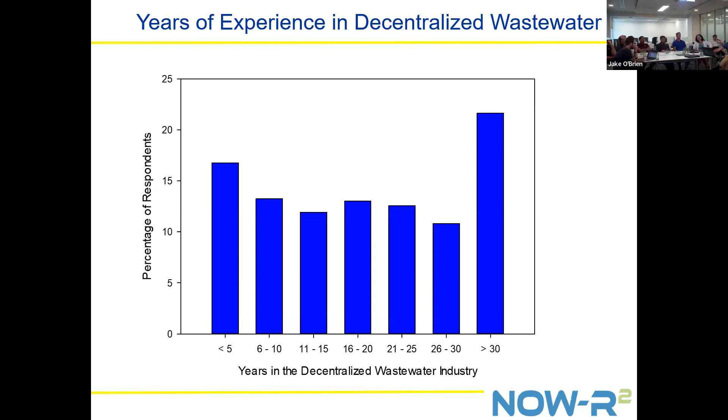I thought this was really interesting, and it really gets at where our industry is at, is that most people have been doing this a while. You can see the greatest respondents was more than 30 years, and one of our challenges is the less than 5 years, which will come up a little bit later in the demographic information.

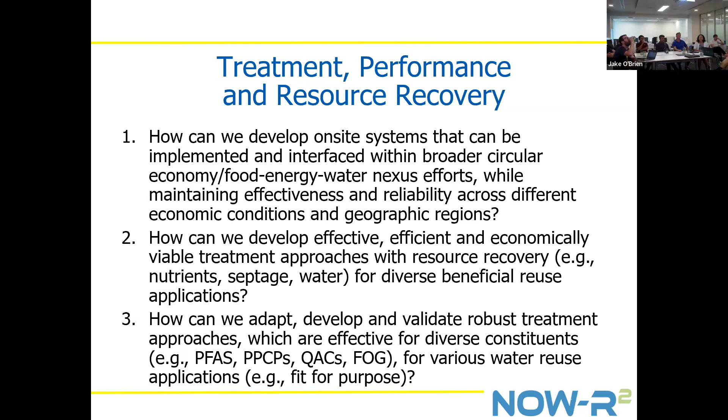And the last one is really looking at more emerging issues. How can we adapt, develop, and validate robust treatment approaches that are effective for things like PFAS and pharmaceuticals, for various water reuse applications? So the second bucket was around resiliency, efficiency, and sustainability.

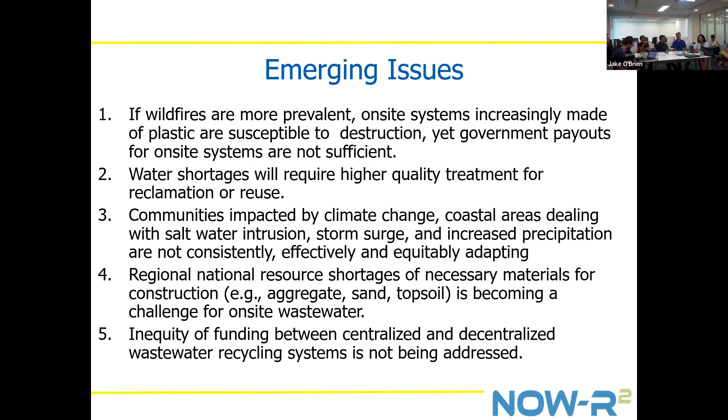So those are some of the challenges. There are certainly more, but I just wanted to hit some of the highlights. I think as an industry, we've come a long way. And the purpose of this exercise was to point out that a lot of the research that we use as the basis for our systems and implementation was gathered around when I was being born.

Which Ben asked me how old I am. I'm almost 50. So let's just say 50 years ago was when a lot of the fundamental research was done, and have we made some strides? Yeah, but there was a huge investment at that time into really figuring out some of the science, but we really haven't had that same concerted effort to continue to move our industry forward. We kind of had piecemeal approaches, but we're hoping that the results of this, when published, are something we can take to stakeholders and funders to really help our industry continue to move forward in really recycling water back into the environment safely.

Thank you, Sarah. Just quickly, I'll start off with a few questions and I'll get Dendra to let us know with those ones there in the chat if there's anything pressing from the audience.

But do you think one of the reasons why we're bad at lobbying is that as an industry, we're decentralized? Because here in Australia, I see how well Sydney Water does and Melbourne Water does, and the bigger water utilities, SA Water, they've got 1 million people, 2 million people, 4 million people in a small area. And they just seem so much more effective at their lobbying than what we do, where here in Australia, it's maybe 2.5, 3 million people which are in the industry, which is much bigger than some of these organisations which are better at lobbying than us. But we're spread out and we don't talk to each other. I know that NOWRA has started going to Congress every year. Has that had an impact?

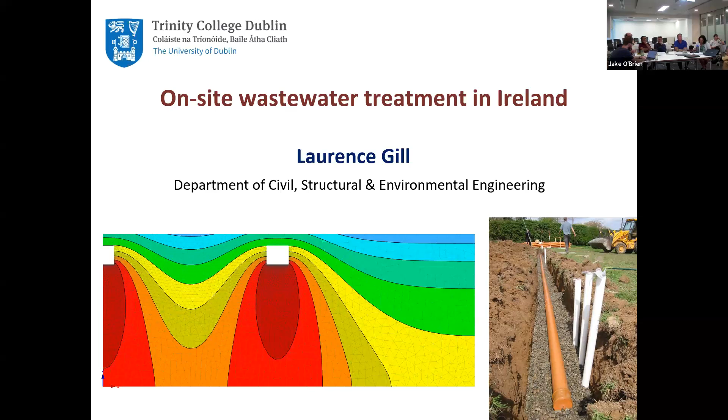But one area I've particularly focused in on has been on-site wastewater treatment, and it's all been done at field scale, and then we develop a lot of numerical models to make predictions to improve the processes, or what contaminant loads get to the groundwater or get to surface water. So I'll just give a flavour of different stuff we've done. First of all, just a few key characteristics about Ireland itself on the on-site system.

So about 1/3 of the country actually is on-site wastewater disposal. So 500,000 dwellings, most of which are septic tanks with soil percolation areas. A lot of those also have their own private on-site well supply, so about half those. So there's a risk there of contamination from the human health perspective. But most of the drivers in the EU are more the ecological targets in terms of river water quality, ultimately.

So from a geological perspective, for a small country, we have an incredibly diverse range of geology, but in general, the bedrock and the water table is very close to the surface, so we don't have a very deep unsaturated zone. We have a lot of very old rocks and fissured, fractured rock types. So if the wastewater contaminants get into the groundwater, they move very quickly. We have a lot of karst.

I spend a lot of time developing models for karst systems, karst limestone, and about 2/3 of the country is underlain with karst. So the relevance for on-site is basically by the time the contaminants hit the water table, it should be as clean as possible. We don't consider that there's any significant treatment in the groundwater from a legislation perspective.

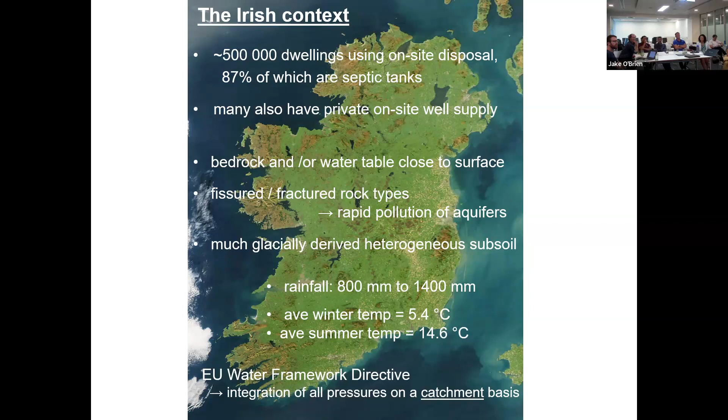And then we have a lot of this glacially derived subsoil, which is very low permeability, which I'll talk about in a minute, particularly in the northern half of the country. The last glaciation was only 10,000 years ago. The rainfall varies from east to west, really. In Dublin, we don't really get that much rainfall, contrary to what most people think. But the more west you go, the higher it gets. And you can see our temperatures, we don't get really cold weather, and we certainly don't get very warm weather. So it's quite a mild climate, because we get the Atlantic coming in, buffeting the island all the time.

And from the legislative process, everything now is really under the Water Framework Directive, whereby all the contaminant pressures are viewed on a catchment basis. There's a lot of work by the EPA trying to work out where are these key sources of contaminants, particularly nutrients, and then we're in a phase now as to what can we do about it. So I spent a lot of time working with the EPA, developing models that feed into their overall model of Ireland as to, from the on-site wastewater perspective, what contaminants are going which direction, and in different soil types, how bad are they?

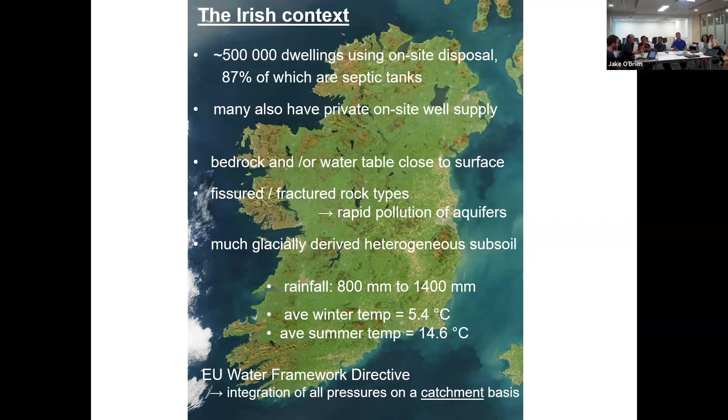So we have this code of practice by the EPA, which is a legislative document that I've helped to develop over the last 10 years. And to be fair to them, a lot of the research has fed into the numbers. So the EPA have been funding people, but particularly us in Trinity, over the last 15 years, to answer certain questions about on-site wastewater treatment, and particularly soil treatment. And so we've been carrying out studies, and then they have used these numbers. So in general, in the code of practice, there's three kinds of scenarios.

This is for single houses. So you have a septic tank going through the unsaturated subsoil. You might have a package system going through unsaturated subsoil, going to groundwater, or a septic tank with some sort of process constructed on site. It could be a sand filter or a reed bed. But the key thing is that it all has to go through the unsaturated subsoil.

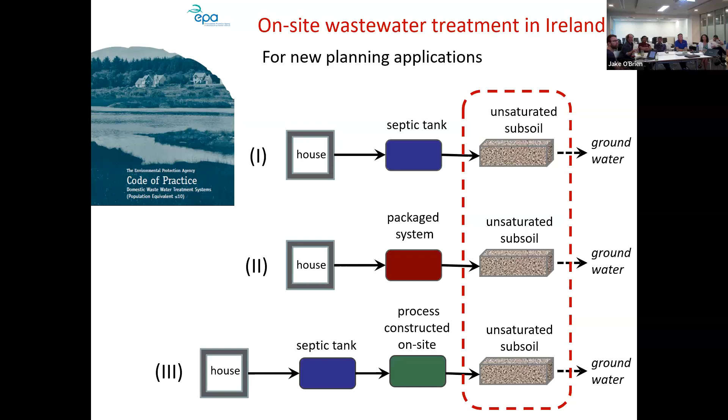That's really, from my perspective, the key treatment step that I focus on. And in counties, although theoretically you can go straight to surface water, none of the counties allow that. So everything has to go through to groundwater. And so this can be problematic in low permeability soils. So I'll just run briefly through these different areas that we've looked at.

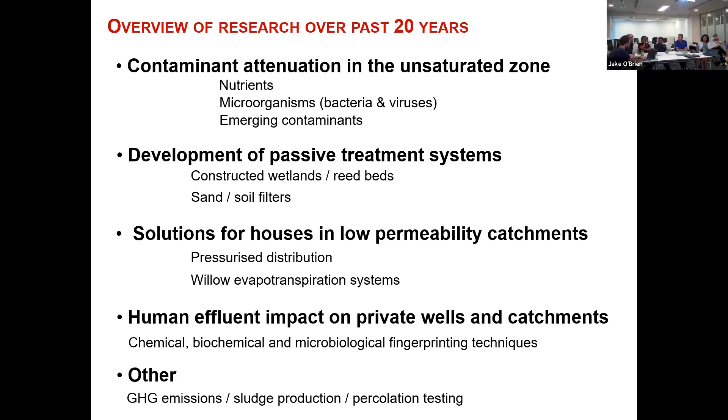So first of all, contaminant attenuation in the unsaturated zone, development of passive treatment systems. We're recently doing quite a lot of work on solutions for houses in these very low permeability soils. We've been looking a lot recently also at tracers of human effluent. So again, on a catchment basis, if you sample a river, what percentage of nitrogen or phosphorus is coming from on-site systems versus agriculture. So we looked at a lot of chemical, biochemical, microbiological fingerprinting techniques, and then a few other things which I'll just briefly mention.

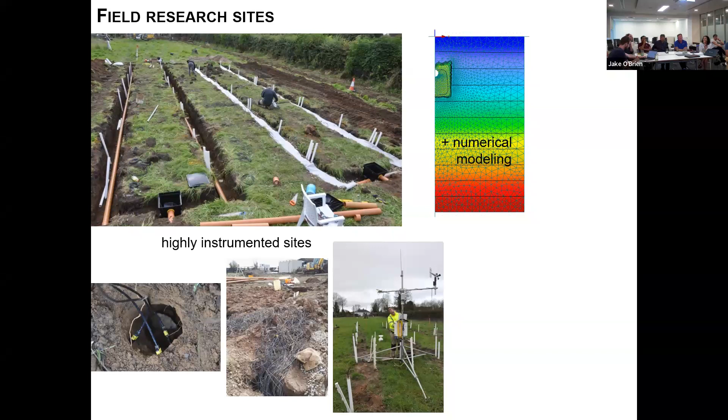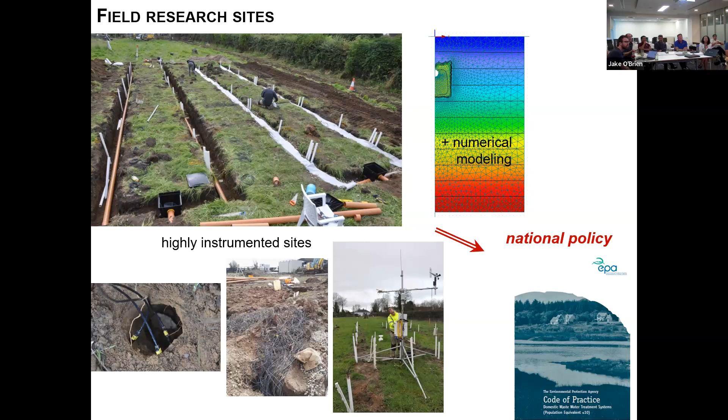A lot of our systems, we look at a gravity distribution as well. So over time, you get the spread of the biomat further and further along the trench, and then we link that into the meteorology. So from that, we develop a lot of models, finite element type models for water flow and contaminant transport, and then that all gets integrated into these design codes, I guess, for different soil types, and then that has ended up in national policy. So that document you can freely download on the website.

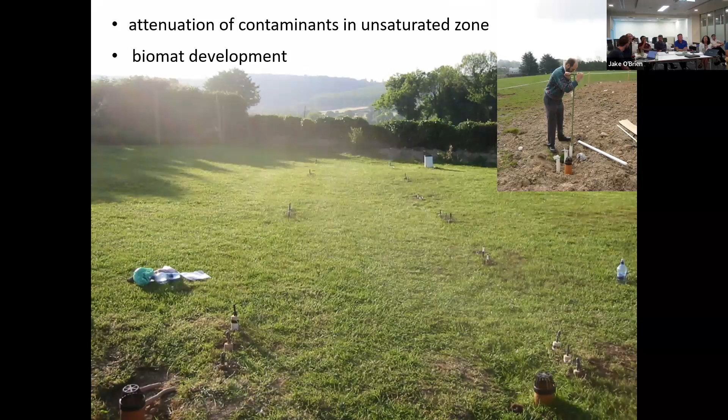And so these are different things that we've been interested in over the years, particularly this growth of the biomat over time. The septic tank effluent has a lot of organics coming out into the soil that develops this quite dense biomat, which spreads the load quite evenly. And at a lot of sites we find the quality of effluent a metre below the trench from septic tanks is much better than if you have a packaged treatment system, because you don't get the development of that biomat and you get much more intense, faster flow down. I know that's maybe slightly controversial, but that's certainly what we've seen time and time again. So if you do have the right subsoil conditions, our advice is to use a septic tank, not to go for a higher degree of treatment.

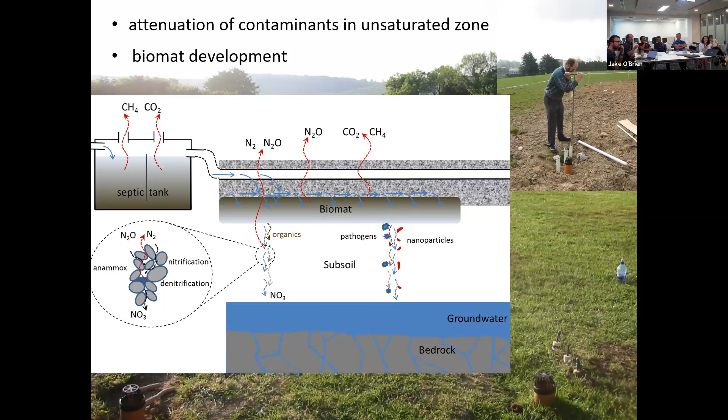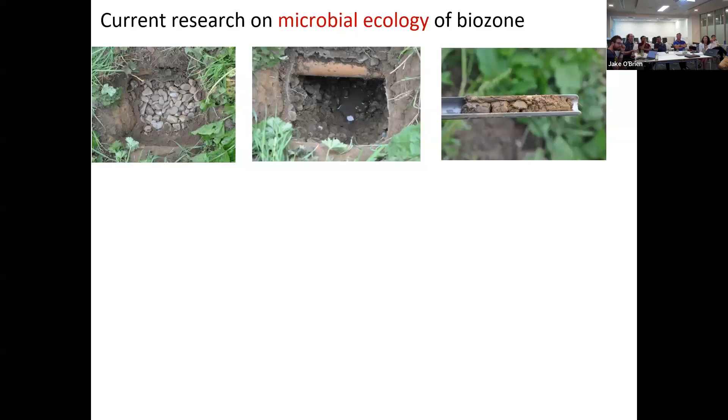And so we've also recently been doing a lot of work on greenhouse gas emissions, which I'll mention at the end. At the moment, we have a new lecturer who's a microbiologist, so we're digging up a lot of these old research sites that we know intimately, and sampling them, looking at microbial ecology. In terms of data, it's unbelievable, this molecular biological information that comes back. But we're trying to link this into the different contaminant breakdowns, so looking at different species of bacteria, different depth levels in the biomat, etc.

So this is all stuff we're looking at now, which is fascinating. Like I say, it's another world what's going on in the soil in terms of all these different organisms, and then linking it to how organics break down and how different nutrients get to different levels, etc.

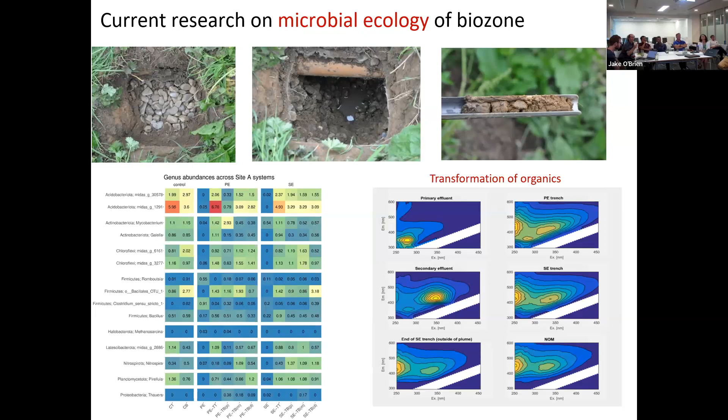So that picture there actually from the surface didn't look too bad. But as soon as we start to dig down, you can see these pools of effluent, and that's going straight out to a ditch and feeding into a lake. So we have the legislation, which I think has been based on quite good science. I mean, I would say that because it's my science, but the problem is it doesn't fit for a lot of the country.

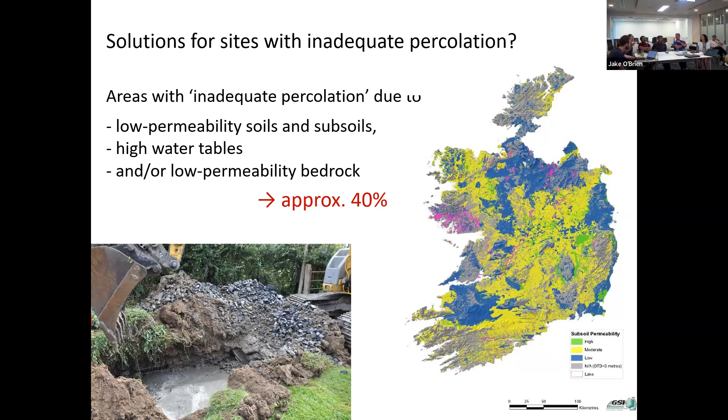Did this make you popular? Well, when I came on this, no.

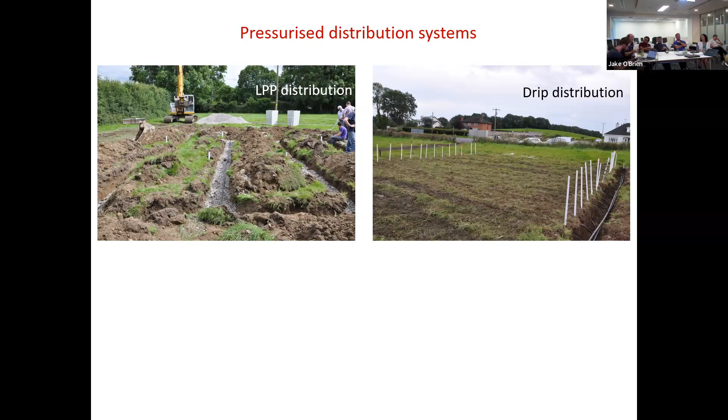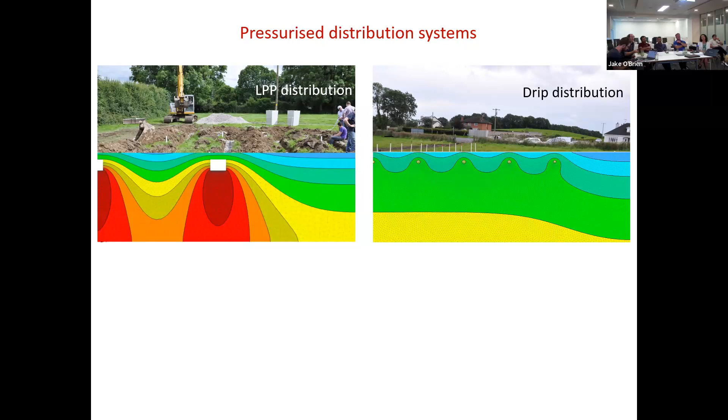So one kind of solution for small subsurface sites is spreading the load out more evenly, and we've looked at comparing pressurized distribution and drip distribution. There's a few sites where that probably would work. So this is modelling the soil saturation at different levels, different times of the year, and the drip definitely helps. But most of the soils that are low permeability are much lower than that. They can't even take the rainfall, let alone the effluent.

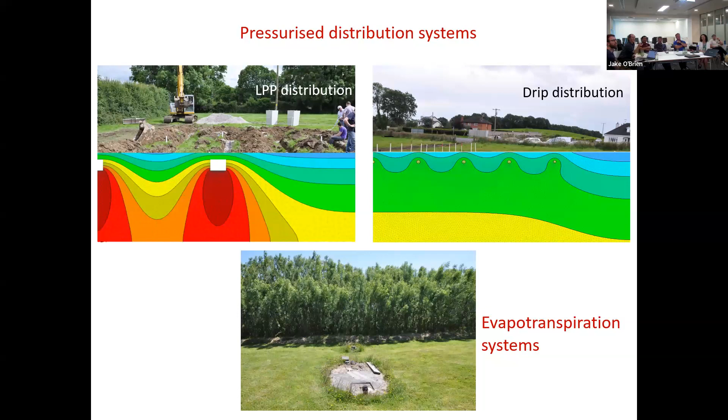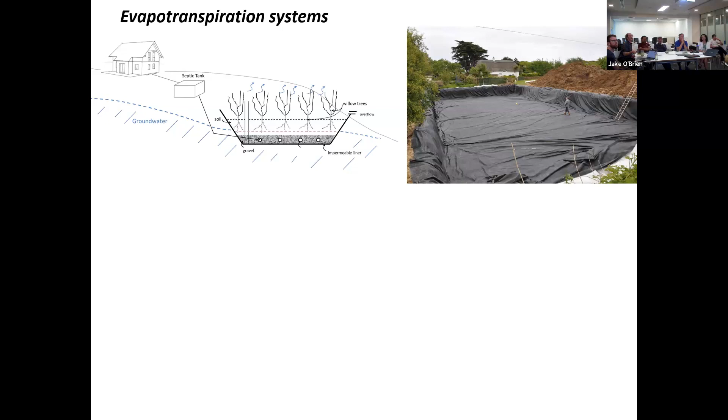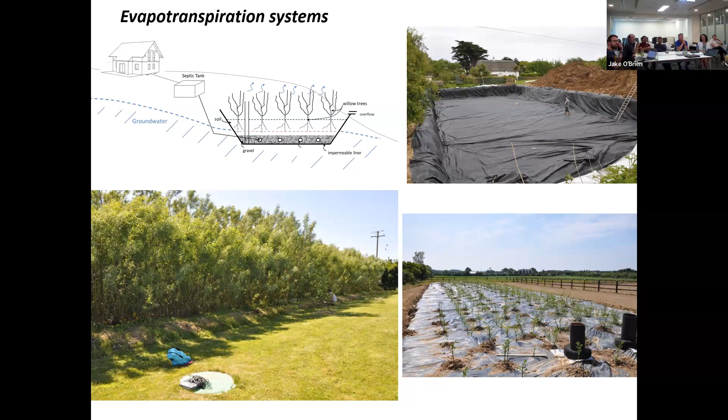So a big load of research we've done recently is looking at these willow-based evapotranspiration systems. What they are is basically an empty basin. We dig out the soil, put a membrane in to seal it, to prevent effluent going out, but also more importantly the groundwater coming in, because invariably on these sites you have very high water tables. And then we have gravel and backfill, etc. And then we grow these willow trees, which have high evapotranspiration capacity. And there's a source of biomass there also, from a circular economy perspective, that can be used to burn.

Now, the issue is that blue line is the water level. Ideally you don't want it to be at the top. It should be throughout the year below the top line. But the way we size these currently is that we do get some overflow, but it's really kind of rainwater runoff. We've tested it, but to the EPA, it's an effluent, and so it should go to ground. The problem is the ground can't take it. So we've got these new systems we just constructed in the last few weeks, where we're partially covering them to get rid of more of the rainfall.

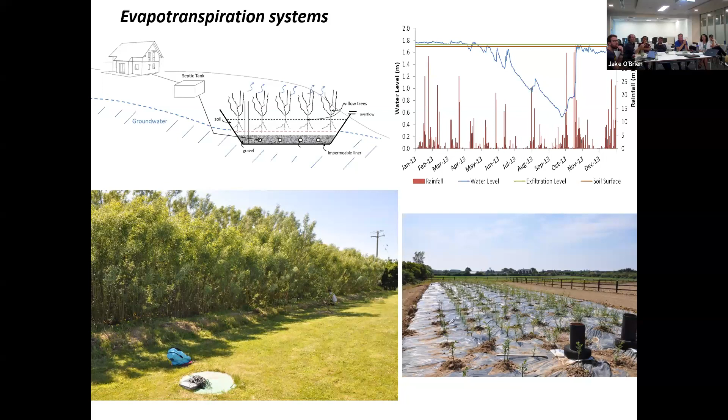So I'm just briefly summarising some of the stuff we've done. Another area we've been looking at is, on a more catchment or groundwater basis, how can we quantify what the impact is of on-site effluent? So we were looking at a range of different compounds that are associated with human effluent and not. Agriculture is the main other threat, and I think by far dominates; if you look at the rivers, it's mainly agriculture from a nutrient perspective.

So there's a lot of different stuff, some things like pharmaceuticals, caffeine, which are expensive to test for. We've been trying to look for, well, maybe not here. I mean, what you have in your lab is like, we have one of those machines in the whole island probably.

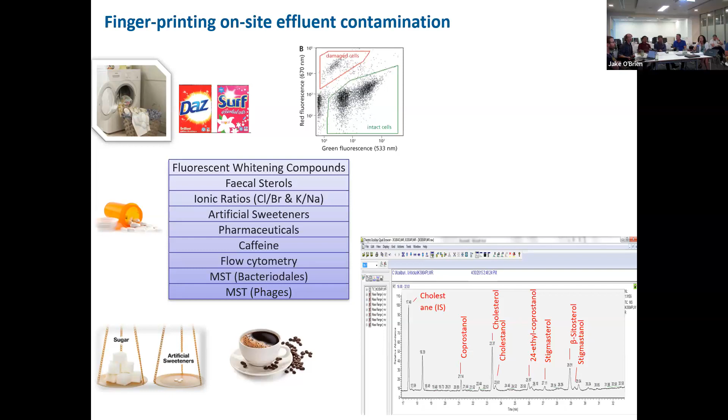But we've recently been looking at pepper mild mottle virus. We did a lot of work on COVID in urban wastewater, and they reference everything off this pepper mild mottle virus. Every time we eat pepper, there's a virus in pepper, so it comes through us. So our recent work is looking at that now in on-site systems, how it goes down through the subsoil, and that is quite easy to test for. So that's a recent thing.

And then, like I say, I work quite a lot at catchment scales and springs: what comes out of karst springs, because the effluent goes down much more quickly. Now you can identify these things, but the next step is how do you quantify how much that equates to in terms of, say, the nutrient loads? You can pick up artificial sweeteners at quite low concentrations, but what does that mean?

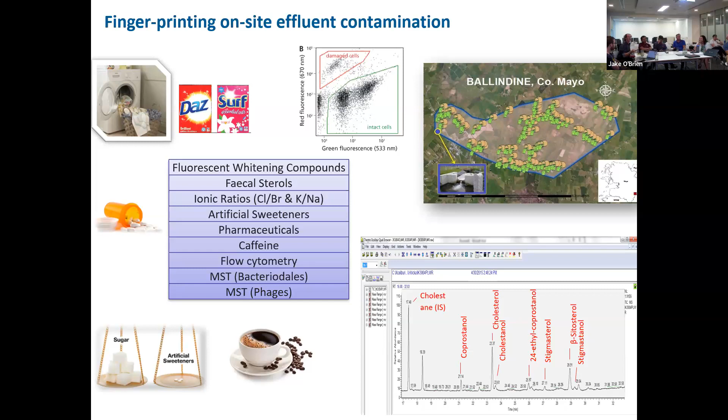So I'm almost finished. Another thing, I know it's been quite controversial. There's been a lot of on-site assessors in Ireland who really want this to come in. Currently we still use a falling head percolation test. So we've been testing out constant head permeameters and then trying to convert our legislation, our current numbers, which are basically falling head tests, into these new permeameter type tests, and come up with conversion figures. So hopefully EPA might take this up because it's a lot more rigorous and it's a lot quicker test as well. So that's something we've just been doing.

Sludge production, that's a project we've just been finishing. It's well known in Ireland, people hardly ever desludge their septic tanks. The EPA were recommending once every year, which we think is far too much. So we tested lots of septic tanks around the country, quantifying the sludge build-up, how much it breaks down in the septic tank itself, and came up with more optimized times for sludge treatment.

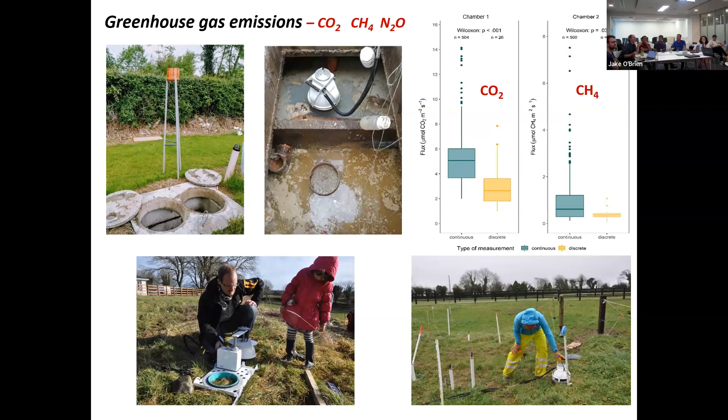And then the final thing, which I spend a lot of my time now doing, both on-site wastewater and also more wetland systems, is greenhouse gas production. So we're measuring carbon dioxide, methane, also nitrous oxide coming off both the systems, but more so the percolation areas, using these different chamber methods, trying to quantify that, and then coming up with methods whereby we can try to reduce, particularly methane from the septic tanks, coming up with devices. Because the problem with the methane from these types of scenarios is it's very low concentration, which is tricky to remove.

Jay, can we have a quick look at what the chat and Q&A questions are? I have it on my phone too. The only new one was from Troy. Final comment: peak flows and peak loads are key reasons why on-site decentralized systems are likely to fail water quality expectations. Over-designed and under-designed systems are both serious problems. Well, that's our challenge. That's what we do.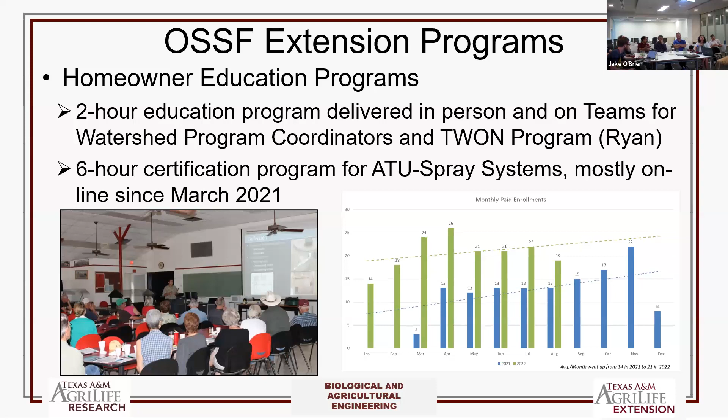I also teach professionals a 2-day, 16-hour class, where we have to design a restaurant system, RV systems and things like that. And that program, we're going to put it online also. We break it down in 4 modules, each will give you 4 CEUs. Texas is all about continuing education units for our licensed professionals. There are 4,500 or 5,000 license holders. They do this every day, and they all need some units every 3 years.

So we do that. Young generation, as Sarah mentioned, we're all going to retire. So from 2017, for about 7 years, I ran this program where 70 young undergraduate students came in summer and worked with us to understand how the aerobic system works, how to collect water samples and everything. I actually hired one student to work for my program. He was really into it, and some of them said, I want to go to an on-site internship. So we are changing a little bit at a time.

So there's some statistics. 70 students were accepted. They actually got paid to work with us. 130 applications, 22 universities all over the world, and this year was my last batch.

We also have capstone, so our fourth-year seniors do a capstone program. We have a partnership with Cuenca, Ecuador, and they have a lot of decentralized small community systems, 35 of them. They are not working, so we take one community every year, and the kids design the repair system. And I asked them, the students are giving you solutions, are you doing anything?

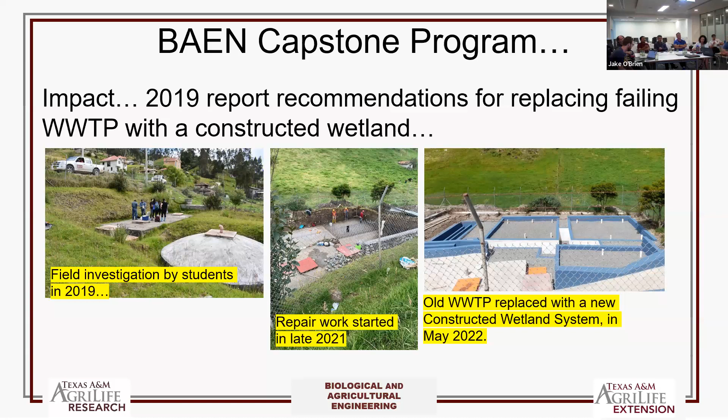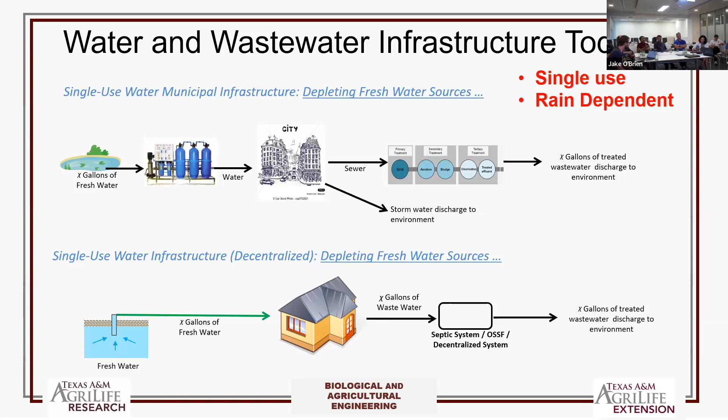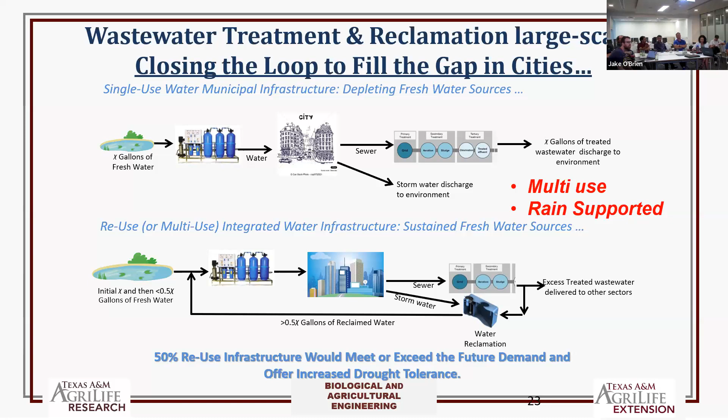What is our ultimate goal? This is what I see. Right now, all of our water infrastructures are single use and they're rain dependent. At least in Texas, we think we're going to have multi-use, basically integrated reuse, now on a city scale. A bunch of cities are now doing direct potable reuse, so they have plants ready to go. When the next drought comes, they will have direct potable reuse. So we're trying to do that for the single family home, and integrate that with rainwater harvesting.

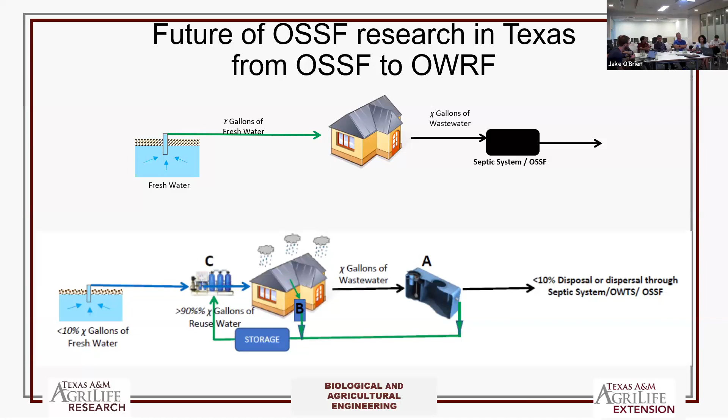And that's the talk June is going to give. He came up with this model where we take rainwater harvesting and use it as an engineered buffer to dilute the waste. These are big tanks, so we're looking at a 1 to 100 ratio: a 300 gallons per day home system, a 30,000 gallon rainwater harvesting system. And June is going to talk more about it Monday, a week from today, in Perth.

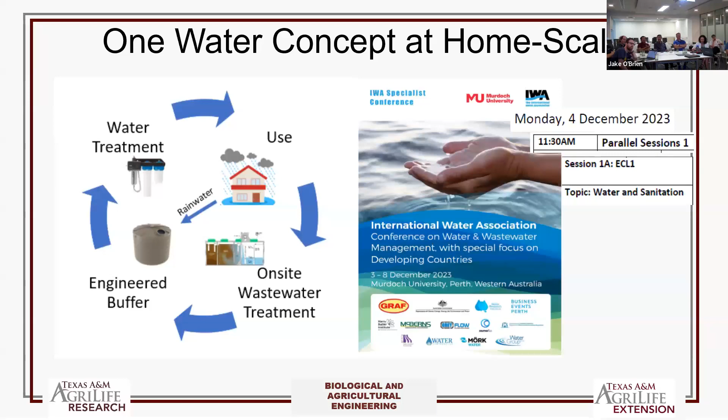I've got a sneaking suspicion that Ted's going to talk to you about it tomorrow. Oh, there you go. So we can start talking tomorrow. So June will give you more about it.

So in summary, we are very busy. I don't know about you guys, but onsite in Texas is booming. Personally, I've been earning a living in this industry for the last 34 years, and I can't stop working.

Which year in the next 5 years are you planning to retire? I wanted to retire yesterday. But I feel this is retirement, seriously. When you're enjoying what you're doing, and it's like, wow, I'm getting paid to do this, I'll keep doing it. So not for the next 10 years.

One more thing. I was asked, and this is a challenge from a bunch of us we met. We're going to start a OneWater certification program next summer. Since my REU program ended, we developed a curriculum, a 6-week program for fresh graduates and consulting engineers. So start thinking about OneWater. And WEF is going to co-sign the certificate with Texas A&M.

Bob Rubin is one of the instructors. We put together a very solid 6-week program. We're going to market it. It's not free. I think our break-even point is 20 students, and if 20 students come to us, we'll offer it next year.

So with that, I'm done. Thank you very much. You're welcome. Jake, can we have a look at what fresh chats and questions have come through? Thank you very much, Jake. Hey, you're welcome. I did it, right? I talk fast. Oh, you did perfectly.